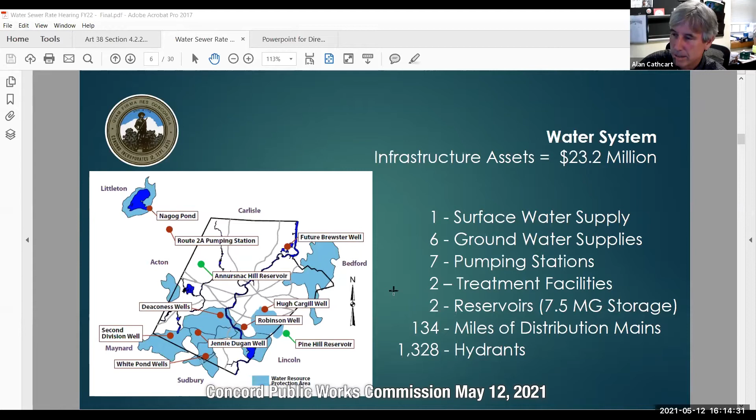Our operating expenses are what we look at year to year. You'll see from our operating and maintenance, we do take in monies to account for depreciation of our assets. We operate as an enterprise using best practices. We have a significant contribution from our user and service fees that go to support general fund services - other town departments like the finance department, town manager's office, and accounting. These are services that we benefit from, rather than having in-house staff, as well as the NRC and planning, for instance, the engineering division who provide support. And then the remainder is for our pumping, treatment, distribution system.

Most importantly, not to get bogged down in the numbers, the goal for our operating projections is to generally have net income where our expenses are offset by our revenues, and the revenues are primarily user fees. So when we talk about rates, that's where it drives home the need to pay attention to whether we're charging enough per unit of water to sustain the routine operating and maintenance needs. What we do is have a 10-year pro forma so that, knowing a certain rate and a certain assumption on demand, we can project what our revenue will be. We can project our operating expenses generally, and again, this is a plan.

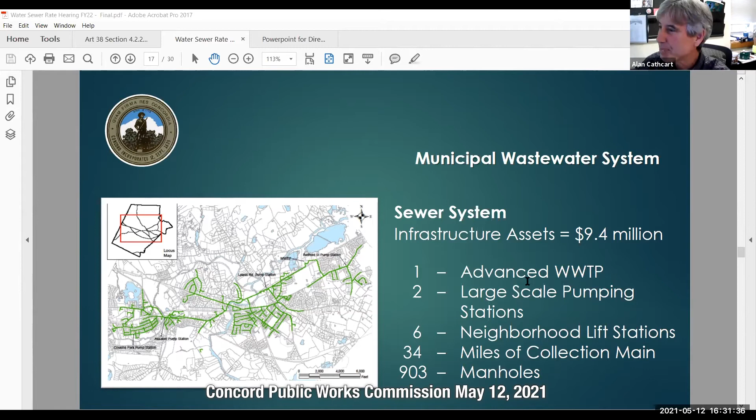Our operating expense, again, 30% of our expenses go to the contract management at the wastewater treatment plant. That's a third-party vendor. We also have contributions to the general fund, just like the water, and significant 35% depreciation. Again, best practices as an enterprise.

Here is our story on the revenue and expenses and net income. You can see that we generally have more revenue than expense projected. You never see the net income go negative. What's important is we are putting money aside into our reserve, which is very important because when you see our capital plan, well, it's significantly less than what we see for water right now. It's still not insignificant, up to $1.5 million of investments based on our wastewater stations, our collection system.

Significant level of effort will be done in planning as we look at integrated water resource planning to try and offset hard costs at the wastewater treatment plant. And we always set aside significant money for infiltration, that's sealing up the pipes. We don't so much replace them like the water distribution, but we actually seal those so we don't have to rip up the road. Some of our sewer pipes are 20 feet deep, and excavating in the more populated area of town at 20-foot depth is not economical. So we do liners and things like that.

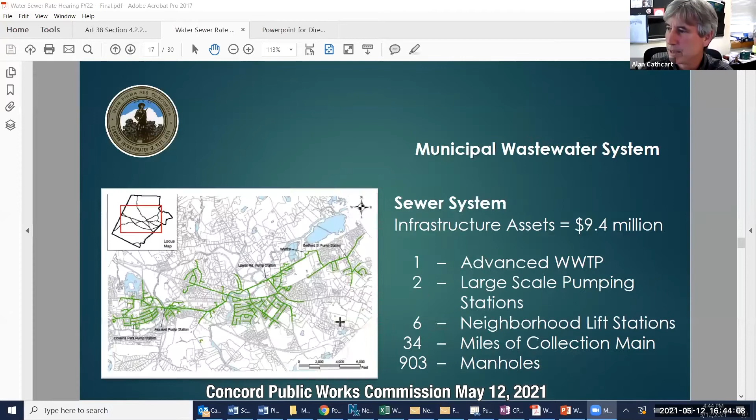But as far as pools and things like that, yeah, when we go into our— I will, Casey, because you mentioned that, I do have that slide. I think it's worth sharing as a reminder to the commission that our seasonal demand management plan—I had it here. This is what it looks like.

Basically, these are seasonal demands, because during the summer is when we have our peak demands. We always have best practices, which is 1 day a week or 1 inch of water, depending, and if it's raining and you supplement, great. If it rains and you get 1 inch, you should be okay. That's best practices—we only educate, not regulate here.

We get to a restriction, which is where we are presently. This is where we both educate and regulate and take enforcement for people who do not follow. And the enforcement is a real challenge because we're not really well suited to be water cops.

We have some tools where we do some early morning rounds to inspect. The 1 day a week allowance we do is the same day as your trash collection. We try to keep it consistent so people know what day a week they can water, because otherwise it'd be like herding cats as far as enforcement. If they decided what day, we couldn't manage that. So we say you can water on the day that trash is collected.

And if we happen to do a surveillance early AM and we find an irrigation system operable on a day of week where it shouldn't be, we provide notice. It's a warning—it'll be a letter or door hanger to the homeowner. And if we see it again, that's where we have the ability to assess a $50 fee or penalty.

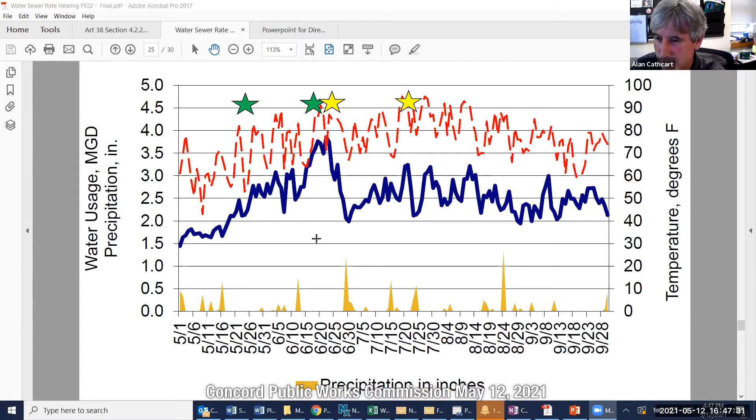So, Casey, is that helpful? Yes, thank you. Can I ask a question?

David: As the novice new commissioner, I'll be the troublesome one, and also naive. So you've just ruined my evening, Alan.

I have to go tell my wife that those shrubs she was planning to buy this spring, probably from New England nurseries, she should forget this year. Is that right? Let me go back to the actual plan. I recommend everybody watching this, we do have it on the website, so you can see the seasonal demand management plan.

But when you're talking about flower bed, shrubs, trees, it's okay. Oh, really? Look at that - that's not the problem. It's the lawns that are the challenge, we don't water a lawn. You are an ideal commissioner. Seriously, I've learned that lesson. Oh good, okay, so we can water a few new shrubs.

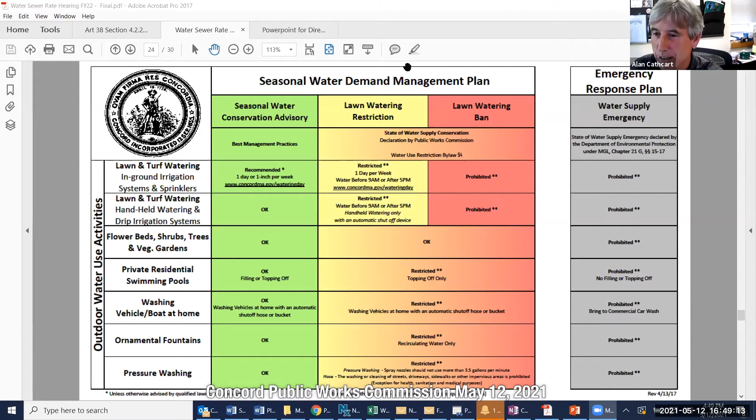Yeah, that's yeah, we are. This isn't to be punitive. We're trying to find where's the water not needed, and it is the lush green grass, which we appreciate people want, but it really isn't something that works in New England when you have water issues. All right, so did I just help you there? Yeah, you did, you saved my - I don't want to say saved my marriage, but you kept my wife happy.

Okay, any other questions or comments? Thank you. So I'm just curious, I would think other residential communities like Concord had the same issues in late May, early June - everybody should have been elevated at the same time, correct?

It's interesting - big story there is there's a lot of attention on droughts and declarations in the state. And it's interesting that a lot of watershed groups are pressing for changes, and there's a new drought management plan statewide, with more and more teeth in it to have all communities abide by the same restrictions.

Not every system is the same. MWRA, for instance, would argue they have a reservoir with 3, 4, or 5 years of storage, so independent of any drought, they're not seeing it reflected in their reserve - they have it available. You may see a challenge where Concord has restrictions, but Bedford on MWRA doesn't, or they're not enforced the same way. So regrettably, or for what it's worth, every system is not the same.

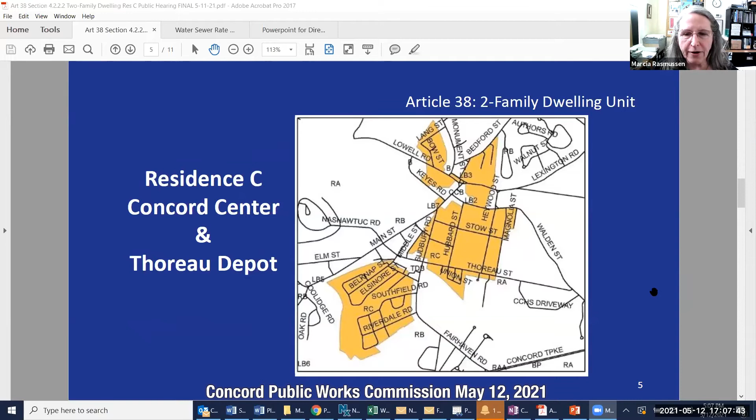Next slide - this shows where those districts are: Concord Center, Thoreau Depot area. Next slide. Okay, and this is West Concord, in the area of Central Street, Laws Brook Road area, and along Route 62. Next slide, please.

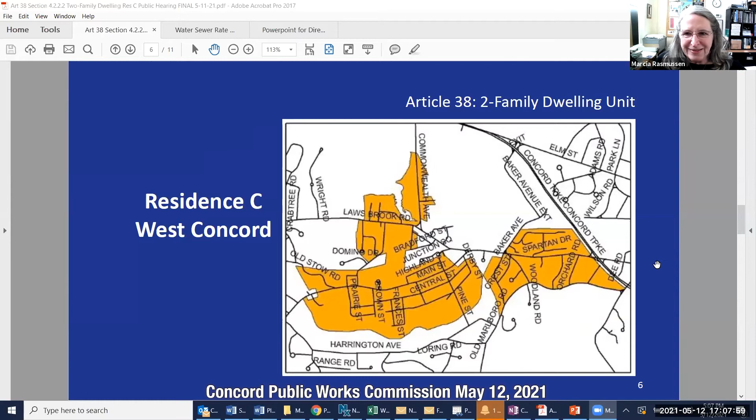So previously, we had a requirement that the owner of the house had to live in the house. There were sale restrictions, so converting - we don't have that requirement anymore. We allow absentee ownership. We are allowing the conversion of a two-family into a condominium. It's currently allowed - it's a question of ownership pattern, not something that we zone.

For this bylaw, the two units must be part of the same structure. They must conform to the setbacks, which for Residence C are 20 feet from the front property line, 15 feet from the side yard lines, and either 30 feet or 25% of the lot depth, whichever is less. So if your lot is only 100 feet deep, you can have a 25-foot setback in the rear yard.

We're suggesting a reduction in the number of parking spaces, and the property is limited by our floor area ratio and the setbacks, so that you can't eat the whole lot, but you do have to provide those setbacks. The special permit will be permanent and transferable. Previously, if you sold your house with an additional dwelling unit, the new owner had to go back and get a special permit for that additional dwelling unit. So that's the nutshell of what's proposed.

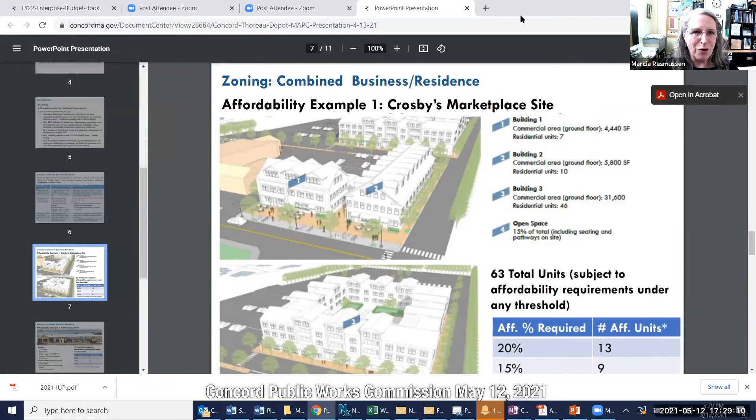So this is just for your information. It's nothing that we're moving forward with at this point in time, but it's part of the conversation.

Thank you, Alan. Thank you, Marcia. That was interesting. So that's something we will certainly be thinking about over the next year as we hear more from the planning board. Okay, and from Alan.

So are there any more questions or comments from the board members regarding this warrant article? Anna, are there any questions or comments from the general public? I do not see any. Thank you.

Let's move on to our next agenda item.

Public Works Commission reorganization. It is time, every May is about the time when we pick new officers for the coming year. I think right now we want to nominate and elect the chair and vice chair for next year. I'm looking for any nominations for chair.

Casey Winslow: I nominate Jeff Vassar for Public Works Chair for the next term. Is there a second for that nomination? David: I second. Thank you, David. Are there any further nominations for chair? Seeing none, let me see if there probably needs to be a special motion here.

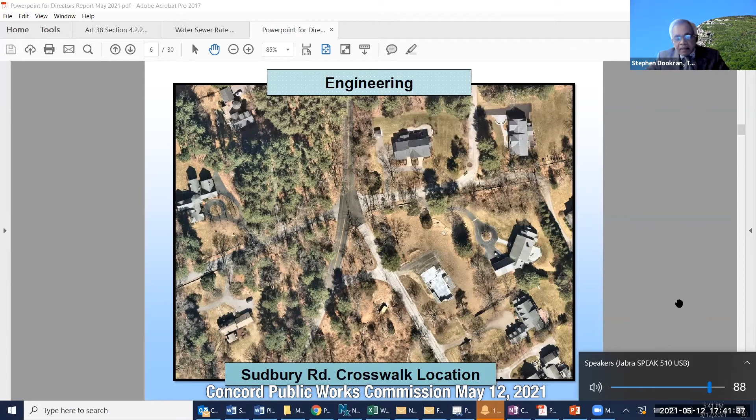Next, this is just the front page of the Hubbard Street reconstruction project, another Complete Streets project. We discussed this in the past, improvements between Thoreau Street and Walden Street, including replacement of sidewalks which are in deteriorated condition, and putting in new curbing.

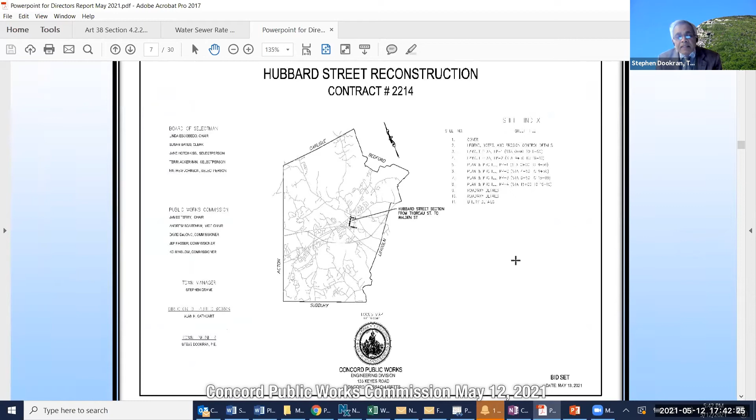There are also improvements to the drainage, which has been causing some flooding in past years, as well as reclaiming the street and repaving it curb to curb. There are improvements to the crosswalks, especially down at the Walden Street side, putting in bump-outs to make them safer than they are today.

In conjunction with the Hubbard Street project, we're going to be bidding out improvements to the Stow Street parking lot, since they're close to each other and it was a good decision to bid them out together. We put out the bid today and expect bids in a couple weeks. Total project cost, as mentioned last time, is around $800,000 just for the Hubbard Street part.

I also gave an update on that to the Transportation Advisory Committee today. Let me talk about two quick items from that committee. The first is a discussion about overall speed reduction in the town.

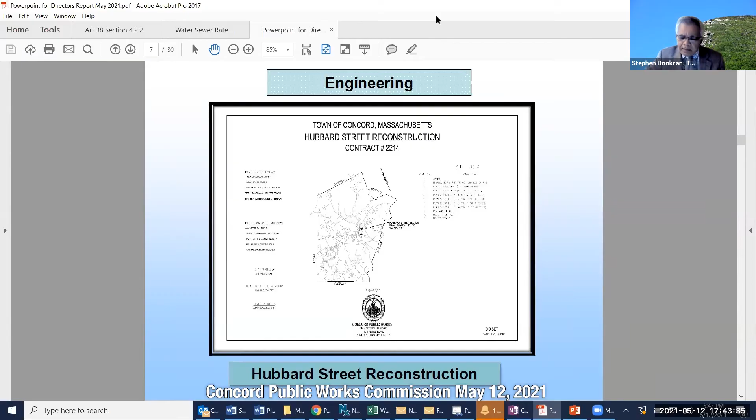We've been faced with issues from residents and others about speeding in several corridors, and a request for whether the town can do a speed reduction townwide. You're all familiar with the 25-mile-per-hour zoning for thickly settled, denser neighborhoods and business districts. So people are asking if this can be done townwide. Opinions have been sought, especially from town counsel, and the fact is you can't simply take a street, like Old Marlborough Road, where speed limits are set through statutory requirements, and change that to 25 miles per hour.

The state controls that process, and it involves doing an engineering speed study and presenting that to the state for approval. So the quick answer is no, the town doesn't have the authority to do a townwide change on speed limits. So I think we have the answer.

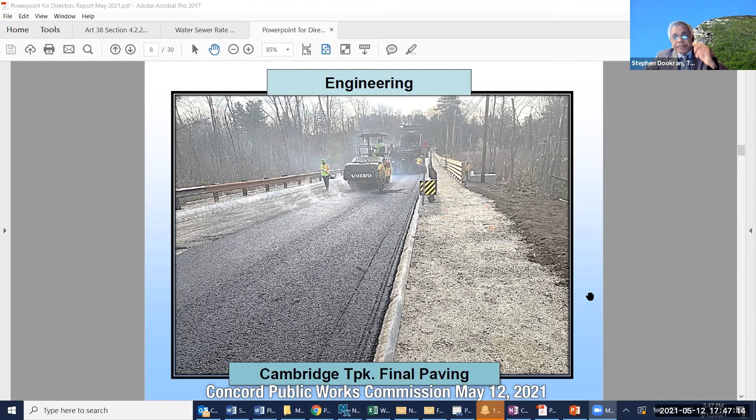This final slide has to do with our MS4 program. As a reminder, MS4 is our stormwater program, municipal separate storm sewers, as opposed to sanitary sewers or combined sewers where sewers carry both sanitary and storm flows. The town, like many other towns and cities, has a permit from the federal EPA as well as the state DEP, and we're required to perform what are called control measures.

One of them is doing public outreach and public education, and with the help of Melissa, this poster was created. We are going to be using this poster at public events, the first one being at an upcoming drop-off event. If you look at it closely, you'll see QR codes you can scan with your cell phone camera right on the screen, and it'll bring you right onto our website with more information. The first one brings you to the town's website about our stormwater management program, and the other two launch you into different sites.

The last one is pretty cool - if you scan that, it brings you to a video on Think Blue Massachusetts, and that's a neat video. So we want to continue this outreach. It's a requirement of the permit. We have to report on this measure as well as other measures like street sweeping and catch basin cleaning to the EPA. And that's it for us.

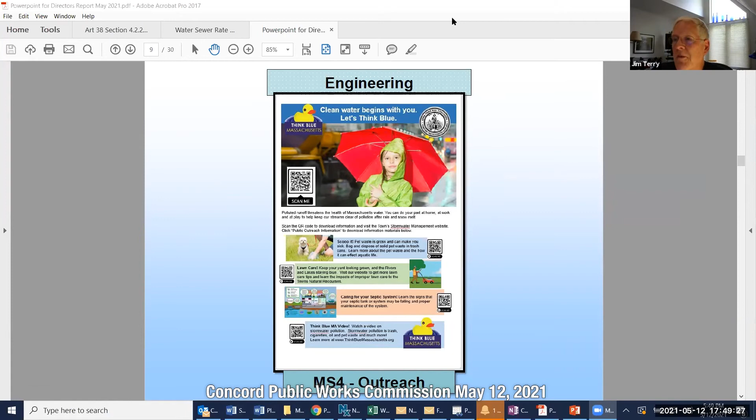Thank you, Steve. I have one question. Newport Construction was awarded both the 2020 and the 2021 roads program contract. Are we getting enough bidders every year? I just want to find out whether you're comfortable that we're getting enough competitive bids to do the programs.

Yes. So the 2020 bid was last year, and Newport won it. It was later in the year, and we did not proceed because we had some issues with neighborhoods and some utility work. So we deferred the work to this year. But that was a competitive bid, and we got a good price. It was just a few streets because the year was interrupted with COVID issues and so on.

This year, the 2021 bid was put out in a timely fashion in the winter, and we had 5 bidders, and the price was very good. It ranged from around 700,000 to almost 1 million dollars. Our engineer's estimate was actually over 1 million, so we were pleasantly surprised that it came in that low.

And it's a good price also because the second bidder was only $30,000 more. We don't know if this is something to do with asphalt pricing at the time, but we have since seen a trend, an uptick in overall construction costs. So we are worried that it could be an issue. I just wanted to be sure that the town is comfortable that we're getting sufficient competitive bids, that we are in fact getting a good price. And only because the same contractor won two years in a row, I asked this question.

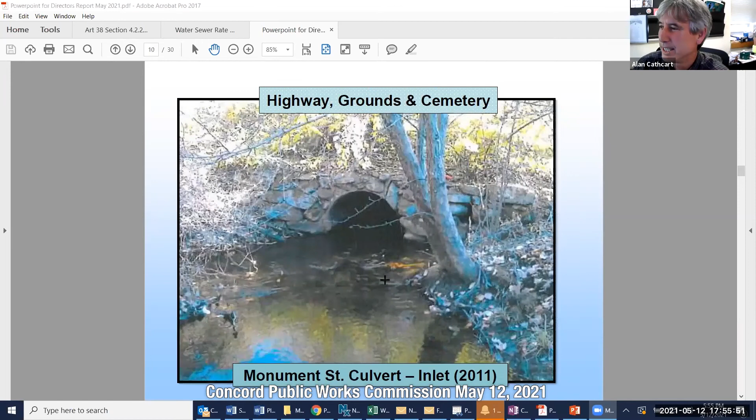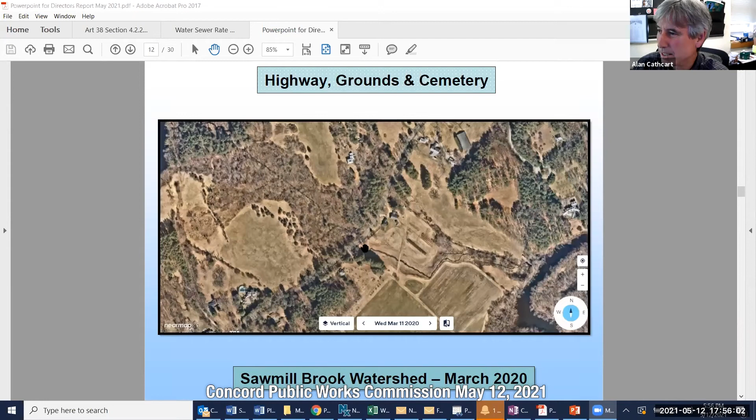But the culvert itself, when you can see it—this is the upstream channel and the downstream channel. This is upstream here, this is downstream. Aaron, if you can take it from there as far as the response.

Yeah, absolutely. Good evening, everyone. My name is Aaron McCloskey, I'm the Highway and Grounds Superintendent, Concord Public Works. So two weeks ago, after speaking with Steve and Delia Kaye, Natural Resources decided to try to breach a beaver dam that had flooded a significant area. There you can see, I think we're upwards of plus 15 acres of flooded lands. So we attempted to mechanically remove the beaver dam with a contracted excavator, a large piece of equipment.

We were at the site monitoring the flow. It appeared to be successful for the first few hours. We returned hourly to inspect the roadway and found after 4 hours that a sinkhole was starting to form just west of the roadway. Just in this photo, you can see just beyond that Jersey barricade. What we attempted to do was save the roadway—we immediately began to block the inlet where we thought the inlet was, where we were working.

With large sandbags, 4x4 sandbags, 16 of those were placed in the pond. That slowed the water flow. What we didn't want to do was compromise and collapse the roadway.

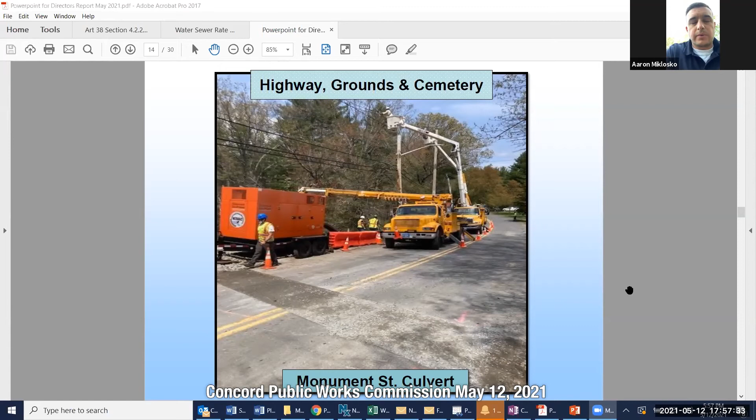So we were successful in saving that, and then immediately began to try to excavate to find the inlet. That was unsuccessful. We went down about 15 feet, as far as we felt comfortable without compromising the road, before we decided to backfill the side of the road and install some temporary bypass pumping.

So you can see here in this photo, there's two road plates on the inbound lane. That's CPW crews excavating the outbound lane. This is about midnight on two Fridays ago, where we installed a 24-inch ID corrugated plastic pipe in this trench, which essentially acted as a sleeve for one 10-inch and two 6-inch discharge hoses, where we set up large pumps on the side of the roadway.

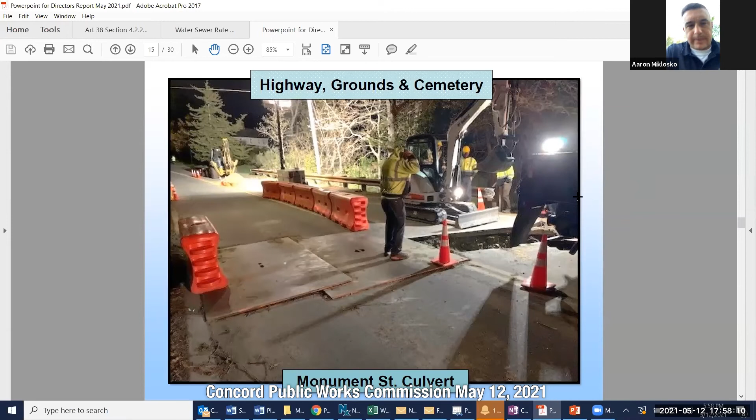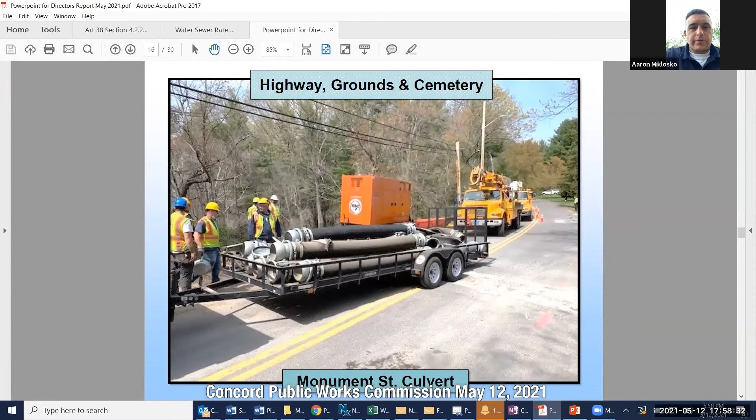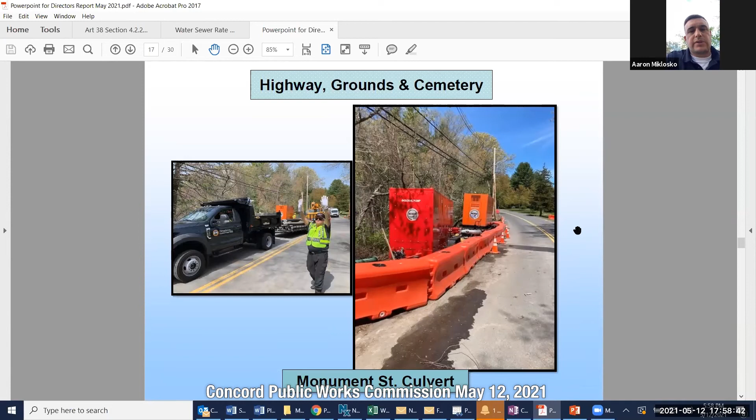You can see here, there's a 10-inch pump. We are a member of NERAC, which is essentially a regional consortium of municipalities where NERAC provides emergency management assistance in the form of equipment and resources to municipalities at low or no cost. So we contacted them. We were able to get these two pumps, a 6-inch and a 10-inch. We set those up along the road and were successful in sleeving and discharge hosing underneath the roadway to try to pump down as much as we could the upstream pond that had been backed up by the beaver dam.

So here you can see the outlet. This is the downstream side, the slope. You can see quite a steep slope here. Two Concord Works employees connecting discharge hoses coming out of that 24-inch plastic corrugated pipe.

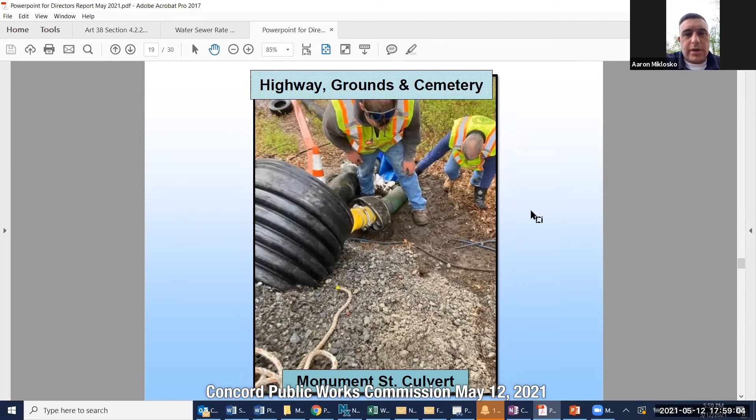Essentially the operation we started on Thursday, worked Thursday evening, Friday into Saturday morning to set this up, and then the following week as well. We had at the height of the operation three pumps running. We were down to two pumps. We're down over a couple of feet now. This is the discharge. You can see there's quite a velocity and a lot of water, a high volume of water coming out.

So we set up downstream hoses going to another section of corrugated pipe to try to diffuse the velocity of the water coming out, tied down with some of the water-filled barricades that we have, and laying on a large tarp to try to minimize the amount of erosion we see downstream. So far, this is a current photo. If you were to go there tomorrow and take a look at it, there's a 10-inch and a 6-inch pump running as we try to pump down the beaver dam.

So quite a significant effort, a number of labor hours with our staff, working closely with contractors and some of our external resources again to get this thing set up. Also, I have to thank the CMLP Light Department. In the first photo that Alan showed, they were instrumental in assisting us with resetting a couple of poles. We had to relocate two utility poles that were in conflict with the operation.

They also assisted us with deploying the intake. The intake section goes out probably 20 to 30 feet from the edge of the roadway, and their line trucks were able to help us rig the hoses to drop them out far enough that we were able to get adequate flow into the pumps. So thanks to CMLP for that. Also, Concord Police Department for supplying basically details around the clock for a number of days, and they are still assisting us with after-hour inspection of the area to make sure the pumps are running and nothing's blowing out on the side of the road.

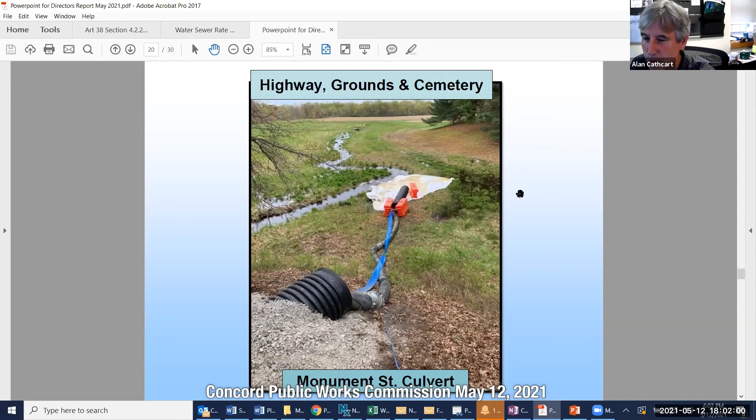But so we have a mechanical means of draining that little sub watershed until we can get access to the actual culvert itself. We may do a temporary repair followed by a more permanent repair, but everything's going to happen probably within months. So it's kind of a fast track - this is what happens when infrastructure isn't maintained, or if there's catastrophic failure. It determines schedule, not so much you. So that said, engineering will be giving us updates on this as we go.

April was a busy month for CPW and Highway and Grounds, besides the Beaver Dam and culvert situation. We worked up at Alcott Field at the Alcott School, coordinating with Concord Public Schools and the CCYB, at their request, to skin the baseball field up there. CPW crews worked on this project over a couple of days to allow a greater amount of play up at that field.

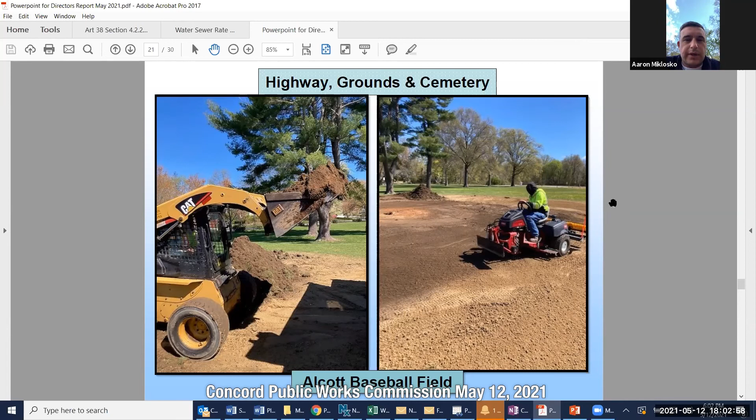This was done mainly because of the shutdown starting soon at Emerson Fields. Those baseball fields will be offline for the majority of the summer as we start the Emerson Field Improvement Project. So CPW crews came in, skinned the field, and brought in some new infield material to make that a more playable, usable field.

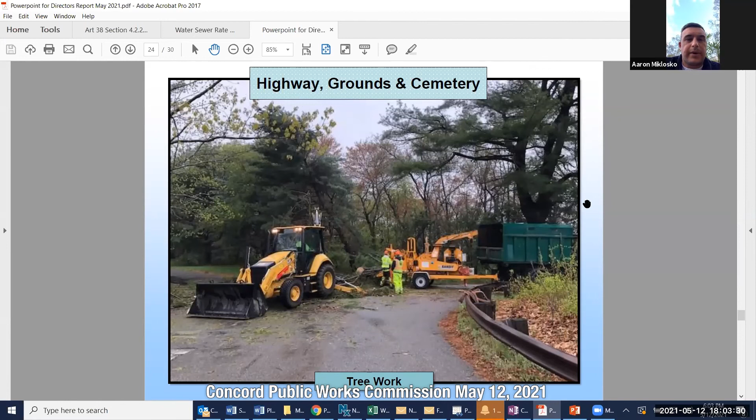We did have some high wind events last month. The next few photos are for some downed trees and responses from CPW crews. Trees keep us busy this time of year. Not only are we responding to weather events and emergency unplanned events, but also receiving quite a number of calls from residents wishing to have tree inspections done. They're seeing trees on their property that are either not leafing out in the springtime, or were damaged over the winter that they're just now observing since they're out and about on their properties. So we are making a number of house calls to do tree assessments and working with residents to remove or maintain public shade trees.

Also last month, in the beginning of May, we planted over 40 public shade trees throughout town as part of our spring planting program. We'll actually be at the townhouse tomorrow planting this year's Arbor Day tree at 22 Monument Square, corner of Monument Square and Bedford Street. That will be installed by tomorrow afternoon.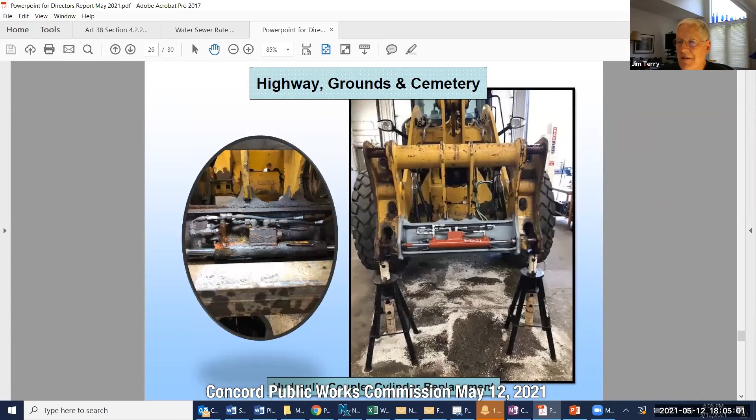Sorry to interrupt, just quickly on the Beaver Dam and the culvert - I think you answered one of the questions. So what we have is a temporary solution, we have to go back in. I assume you guys are up on grants, so I assume you know about the state small bridge and culvert replacement program. Is that something we might be able to use, or do we need to act too quickly to take advantage of it? I know we've... Steve Dukran, I don't know if you want to weigh in. We did get an application, it was kind of low cost, but Steve, do you have a thought on the grant process and whether that could possibly be leveraged?

Yeah, so we did get an application for a small culvert within one of the town properties, one of the forests. The criteria for these grants: you have to replace the culvert in entirety, and make it wide enough for wildlife passage. So you end up with something much like a small bridge. The culvert right now is 5 feet wide but 3.5 feet tall, so when all is said and done, you're probably looking at a new culvert about 10 to 15 feet wide. The amount of money that comes in the grant is very small - I think your upper limit is like $200,000. So the investment from the town side will be much more significant than what we are looking at right now for the repair.

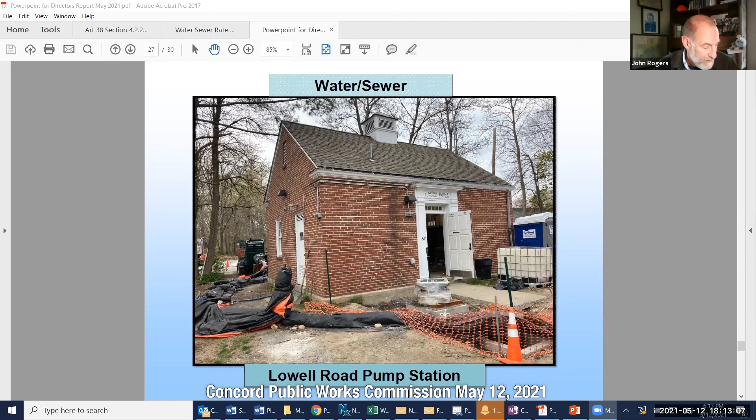We've got lots of little details to fuss about and get done here, including some facelift on the building. I'm hoping that by the time we present another picture of this at your next meeting, the Lowell Road pump station will look a lot neater, prettier, better, and function a whole lot better than it has for this rehab project. So the next one, though, is really the big project, the Nagog Pond intake.

I'll try to keep away from all the nuts and bolts, but just highlight a couple things. One of the things that won't show up in these photos are the beaver we talked about. We actually received permission and trapped 3 beaver recently in the pond that would cause us some real concerns around water quality for this drinking water source. They've been removed, and they were starting to dam up our spillway, similar to what's going on over at Monument Street. So they're an ongoing concern.

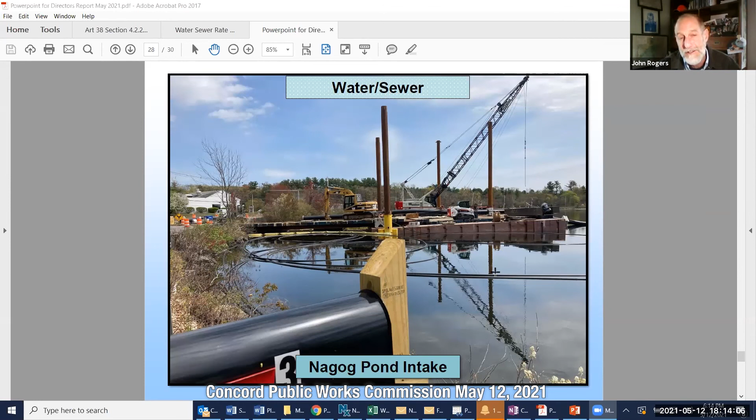What you saw in the first picture was the barges, the 2 barges working with a crane sitting on it, and another crane, and some pipe wound around in the water. That's actually the airburst pipe, which has all been fused, and it's also floating out in the pond. If you go to the next slide, you can see the large diameter pipe, 16-inch diameter, in the fusing machine there, where 50-foot lengths are fused on site. Then the collars to the right are anchors that are collared around, and the small airburst pipe also fits through those.

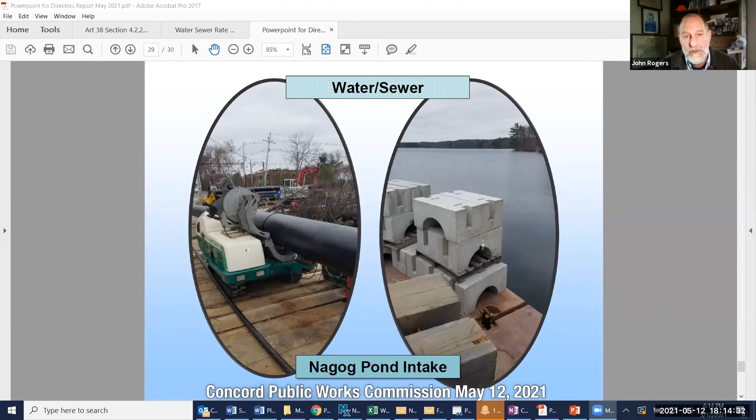Then you go to the next slide and you'll see the pipeline floating in the pond, awaiting some final pieces of material and some work we're doing to clean the remaining piece of intake pipe that we're going to leave in place, at least temporarily. We're doing some investigations, and once those are complete we'll get capacity for the pipe. We're cleaning the inside of that pipe, starting that on Monday.

We've got an intake structure, components are coming in, and we're hoping it might come in as early as tomorrow and start assembling that on the barge. We need that intake structure to get a little bit more work done. We've got the new compressor for the airburst system installed out there, and we're starting to look at getting the electrical connected up. So a lot of activities taking place next week in particular.

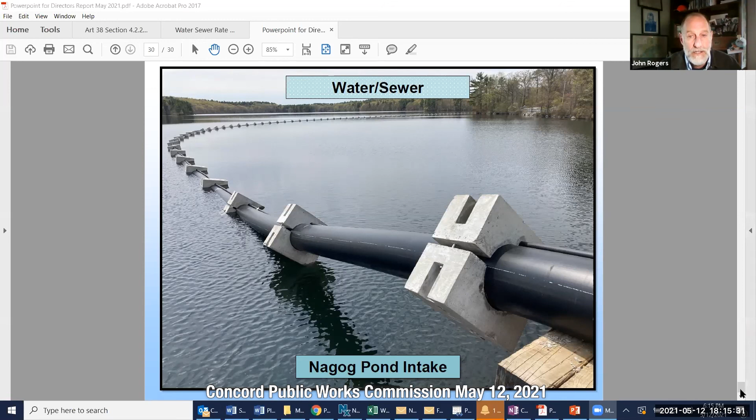Hopefully it'll go very fast then, and we may get the pipeline with the intake structure installed the following week, and then we'll just be buttoning up with the contractor out there. We've got liquid oxygen coming into the site that's used for treatment of the water, and we're getting that system dialed in, working with some potential alternatives to that system, which is required. As we mention all the time, as Alan mentioned in the rate hearing, we're highly regulated, and there are some things we have to work with on the ozone system out there as well.

With all that, we're hoping to be up and running within a month's time out there, sooner rather than later, because as Alan was talking about, the flow rates are increasing historically, and in fact the demand on the system is going up and up, and we need Nagog Pond to be a significant contributor to what we supply to the community. So with that, I'll see if you have any questions.

Great. Thank you, John. Are there any questions from the commissioners?

Okay, thank you, Alan, and all of your leaders for the report. I think that was very thorough and gives us a lot of information. Last item on our agenda is: are there any questions from commissioners or comments about the items today, or things you've heard from other residents?